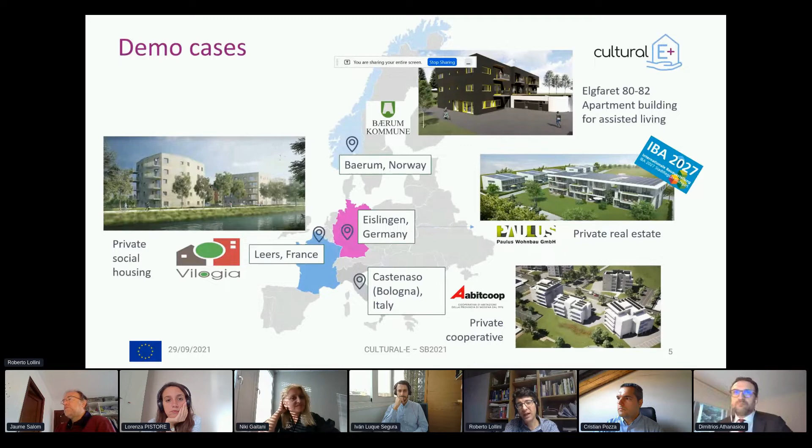So multifamily buildings in France, Italy, Germany, and Norway — different climates and different contexts. There are both social housing and private housing. The partnership is quite heterogeneous, with research centers as well as industry partners providing technologies, the owners, and a technical advisor to support the development of the positive energy building concept in the 4 demo cases.

We are trying to answer the impact as requested by the call, and to define possible replication scenarios - not only working on our demo cases, but also having a larger view. These are our 9 specific results: a platform where it's possible to analyze and define the context for the development of the design.

And so 4 key technologies, as I call it: a house management system, a smart hybrid ventilation through an active window, the use of ceiling fans for air movement - this is quite important to reduce the cooling need - and a decentralized packaged heat pump system, integrating both ventilation and heating and cooling system.

This estimation of the co-benefits or co-impacts is a sort of approach in order to estimate this as a real estate value for the building.

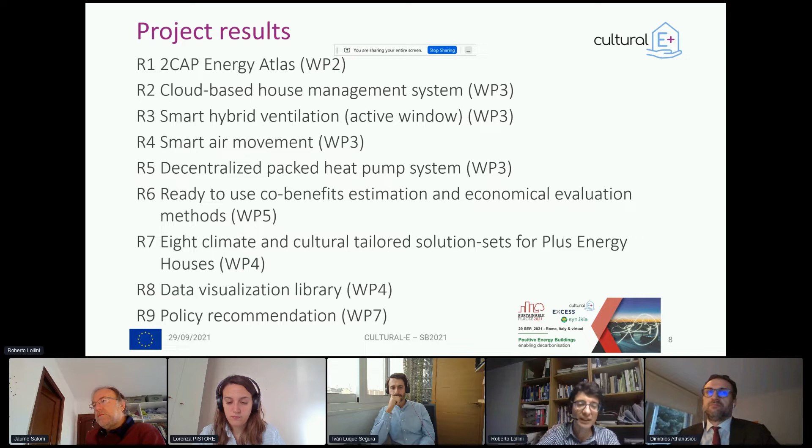The solution sets, as I mentioned, are an inspirational set of solutions to start a design process that has to be tailored to the specific context. Then there's a way to visualize the result of simulation, a tentative standardization to present the simulation results in a standard way, and then the policy recommendation.

Here it's the first step of this policy recommendation related to the positive energy building definition. It's a quite complex interaction among modeling, technology development, and implementation - practical implementation of the demo, design, construction, and maintenance of the demos.

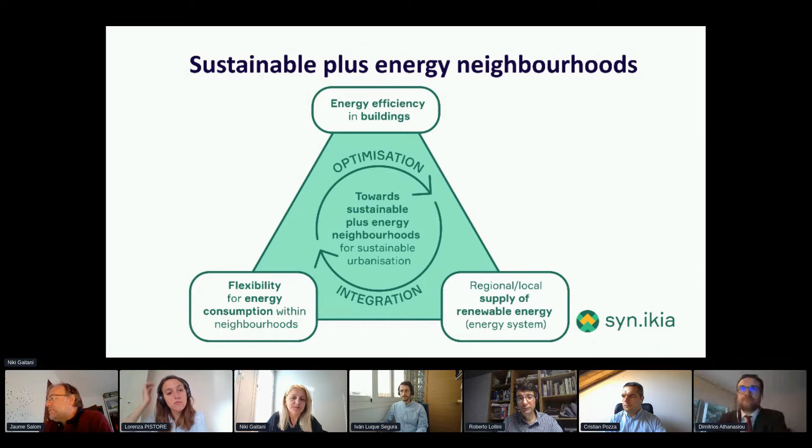A key challenge is to significantly increase the overall energy efficiency, energy flexibility, and climate resilience of neighborhoods. Our implementation plan is actually aligned to the set plan - it's about optimization of these 3 functions. The Synikia definition of sustainable plus energy neighborhood follows a similar procedure as described for buildings, but the geographical boundary is expanded to the entire site of the neighborhood.

The balance is calculated taking into account all building operational energies: space and domestic hot water heating, space cooling, ventilation, and fixed lighting, but excluding household appliances, the plug loads.

The Synikia concept relies on the premise that cost reduction can only be achieved by an integrated approach, taking into account the building and neighborhood level, energy efficiency, flexibility, good architectural and spatial quality, as well as user behavior and well-being. To demonstrate the functionality of the Plus Energy neighborhood concept, we are currently developing 4 real-life sustainable Plus Energy neighborhoods.

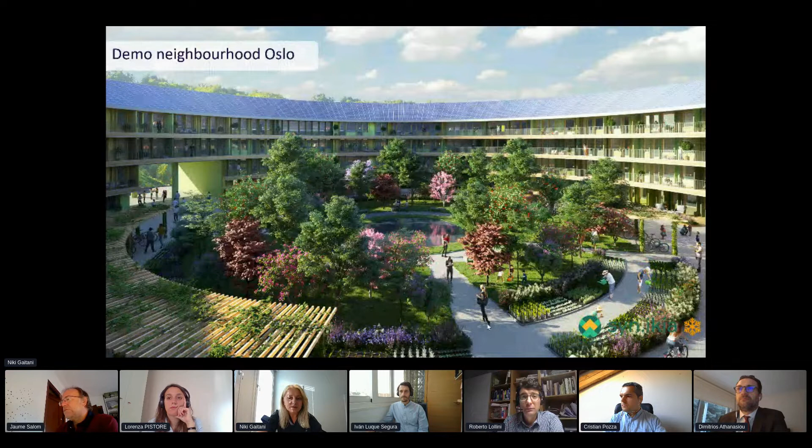In Norway, the demo project is a new development in Oslo, and in the Netherlands, the demo case is located in Uden, a typical mid-sized town in the Netherlands representing a marine climate.

The Spanish demo case is a new development in the suburbs of Barcelona, representing a typical Mediterranean climate. And finally, the 4th case, the Austrian demo, is a new build and renovation project located in Salzburg, representing a continental climate.

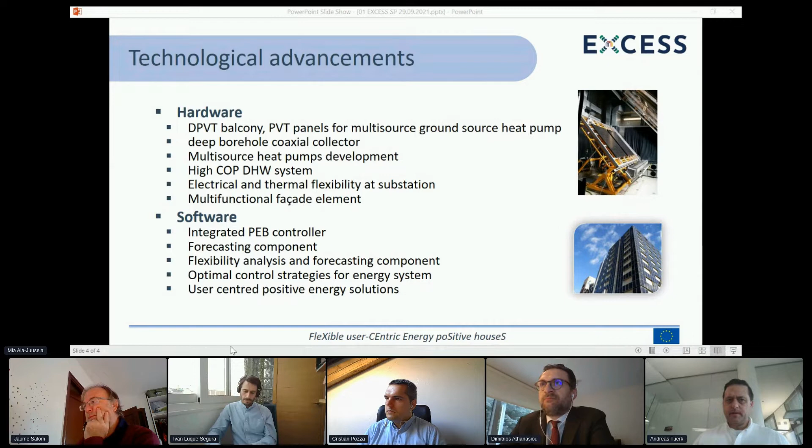I think this was already the short intro into the EXCESS project. I don't want to take too much time because we should move on discussing definitions. The discussion of PEB definition was a key element in the first work package of EXCESS that has been completed. It was led by Mia. I think we have very interesting findings of this first EXCESS work package that we would like to share today.

This next presentation is about the discussion that we have had among these three projects, and that's going to be presented by Cristian.

Cristian, do you want to share your own screen? Yes, let's try. Share the screen and put the slides on reading mode. That would seem to be the best option.

Can you see it? Yes, now. Okay, perfect. Okay, great. So...

This presentation is about, as mentioned, presenting our common work done in the last six months, and we will show you common points and discussion points, specifically around the PEB definition.

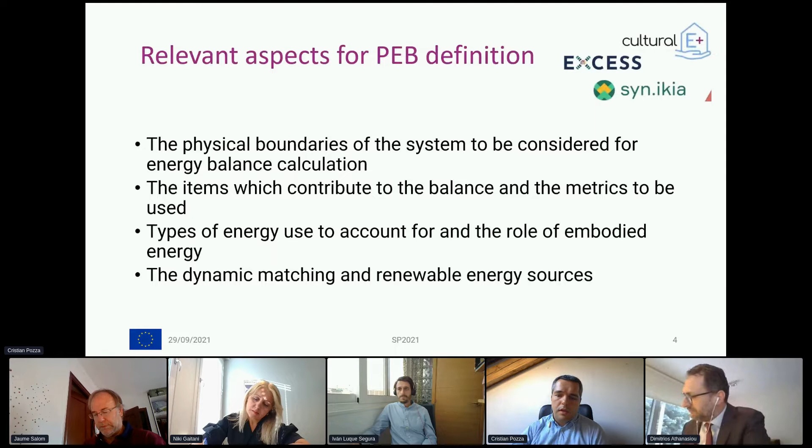Then, of course, we have different points of view, and the second part was aimed to define how these aspects are addressed, and in the discussion paper that we are producing, all these aspects are outlined shortly. So what we could get, for example, are some differences in the definition of the system boundaries, like what to consider as which energy uses fall inside the boundary, where the renewable energy is produced, where it is stored, and which energy efficiency measures are to be considered.

Also, the time dimension has a different point of view, and this different point of view is very important. It is the time over which the building and the systems are balanced, and this can lead to different considerations as well, and different conclusions.

Also, the energy use to be included into the balance is to make the total energy demand, as for example heating, cooling, domestic hot water, ventilation, lighting, and so on, has been discussed, and we have different points of view, but many things and aspects are in common again.

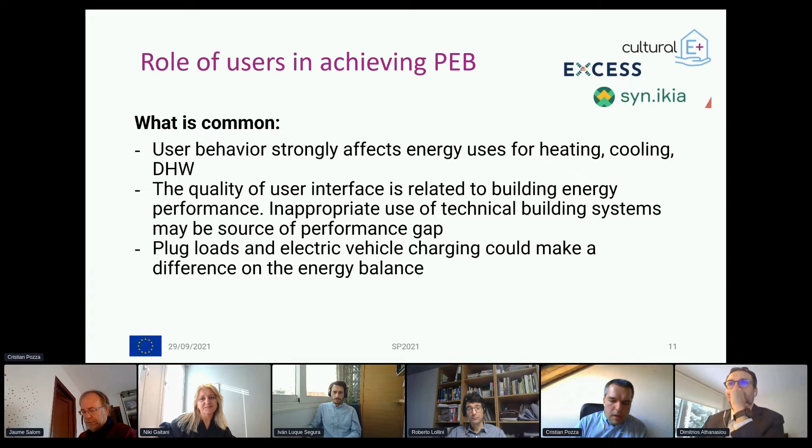identify correctly, or to quantify in some cases.

So the conclusions are the 3 projects produced this definition, which is only part of the 3 projects' specific definition, as: a positive energy building is an energy efficient building that produces more energy from renewable energy sources than it consumes over a time span of 1 year.

And the main difference that we found is whether we consider or not some facilities for renewable energy system, renewable energy source production to be within or outside the boundary.

Next steps will be to explore the role of users and to understand the trade-off between investment cost, operational costs, and benefits. I'll just take 2 minutes for the recommendation.

The first recommendation is residential buildings have great potential to reach positive energy building targets, while offices and educational buildings may achieve this target up to some extent. Then we must pay attention to affordability, cost optimality, and building value, and use that to motivate stakeholders.

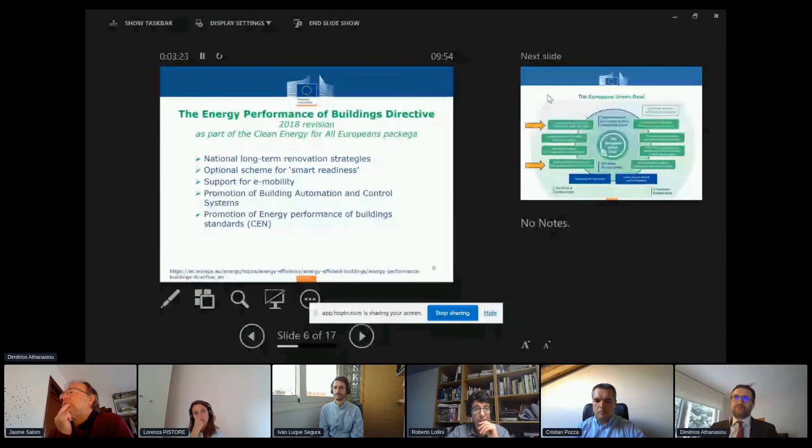We had an evaluation, and still there was room for improvement, and that's why we had the revision in 2018. But that was very targeted, building mostly on long-term renovation strategies, e-mobility, the smart readiness indicator, and the promotion of e-vehicle charging infrastructure. So it was very targeted.

Until the European Green Deal came, and it really recognized the importance of buildings, asking therefore for the renovation wave that we all know about, and also building on a new climate target plan for 2030, asking for more ambition and specific elements for buildings, for example that they have to reduce emissions by 60% and increase the renovation rate, start banning fossil fuels, increasing the renewable component, and so on.

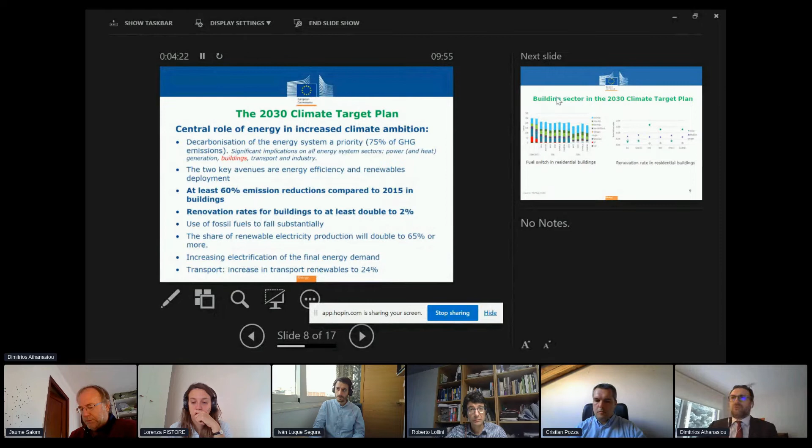So there is a whole new territory now, a whole new agenda, and buildings are very high on it. There was an impact assessment recognizing different scenarios explored, from fuel types to renovation rates. There are many, many results.

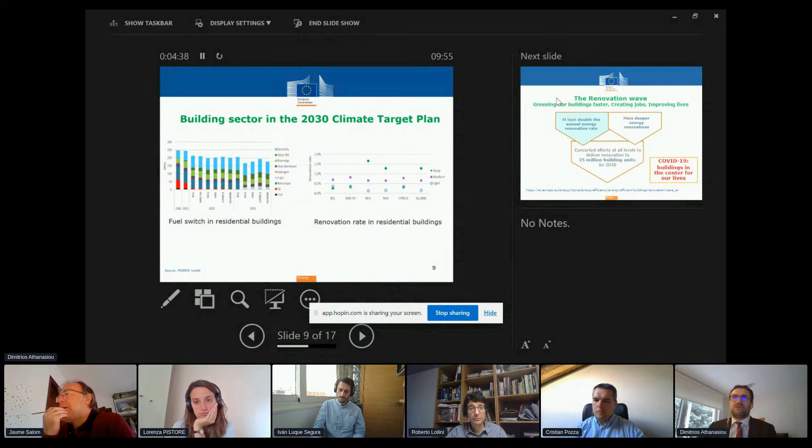Last year we published the renovation wave, asking to at least double the annual renovation rate and make deeper energy renovations and quality renovations, as we want to call them now, trying to renovate at least 35 million buildings in Europe by 2030. But also, as mentioned before by previous speakers, more elements have to be considered, like energy efficiency first, affordability, energy poverty, decarbonization, life cycle thinking, indoor environmental quality, and also health and other standards, so aesthetics as well, of course, and always smart solutions.

All these came with specific actions that have to be implemented through a very comprehensive action plan that has also been published together with the communication. I don't want to stick on that, but focus areas were the worst performing buildings, public buildings, and decarbonization of heating and cooling.

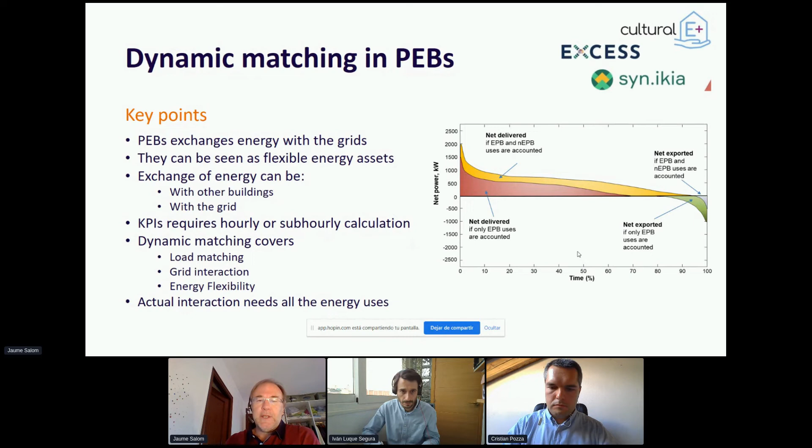Then, as Mia did also, I have a list of potential questions for you, in order to know your opinion and to give you the opportunity to make some observations. If you go to the poll section, I will ask three questions.

The first question I will make visible to you now is: how important is it to characterize dynamic matching? If you think that at the end the most important thing is the annual balance and the annual emissions balance, and dynamic matching is not so important because the energy grid will cope with that, or if it is as important as the annual balance.

Then maybe you can make your votes now, and we will see what people's opinion is. Yeah, I think we have some votes already now.

Okay, it seems that the majority of people think it is as important as the annual balance, but we also have some who think it's maybe not so important. Then maybe we can move to the other polls, but it would be good to know the opinion of that person who thinks it's not so important, afterwards in the discussion.

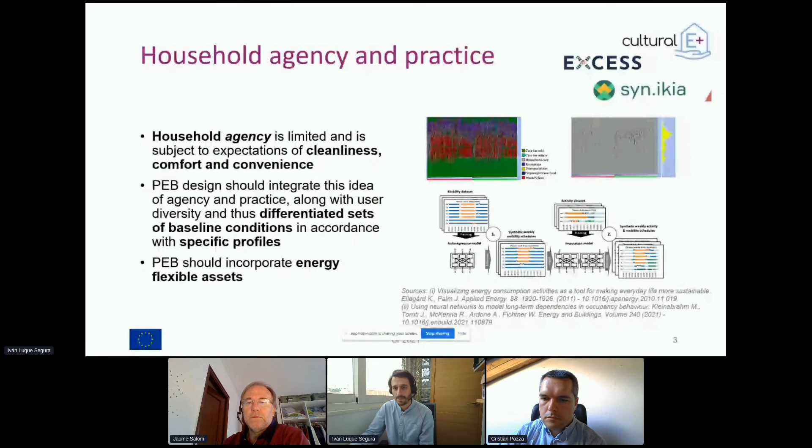Because individual households, however committed, cannot remain unaffected by wider societal trends, we need to analyze and study them and integrate them into the design. Plus energy buildings should also incorporate the energy flexible assets that this may bring into the performance, such as alteration of the standard context of the household or within a diverse building community with different behaviors and profiles.

Also, the indoor environmental quality is a key aspect related to users' behavior, and how to integrate a good definition may be a challenge. Indoor environmental requirements are currently strictly defined based on ideal conditions that generally match subjective sensation of neutrality, where user adaptation mechanisms are generally neglected, because building design usually privileges static environments over transient ones.

Very tight and static indoor environments do not allow us to integrate transition and stimuli as part of the building design, and we are losing potentialities and drivers that can help us meet the plus energy building targets. Then the design of buildings and systems often does not enhance occupant personal control over the environment, which is another key element that could make a difference regarding how to integrate users within the performance.

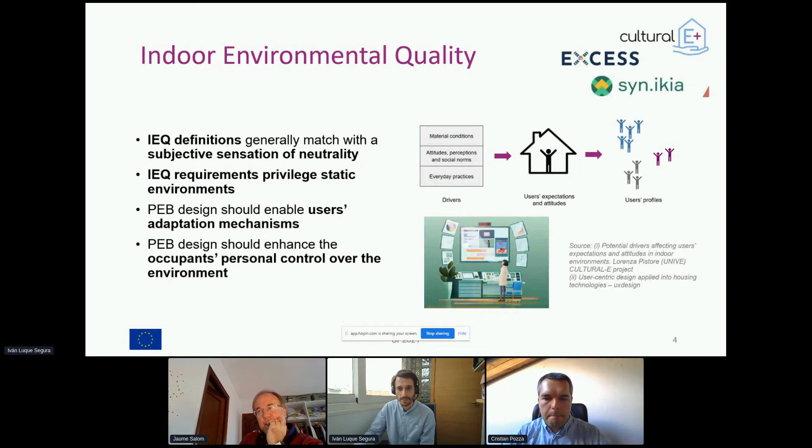As conclusions, we can say that integrating user diversity into plus energy building definition is key, because users do not set out to use energy. Rather, they seek access to energy services. Contrary to the conventional approach, accounting for user practices, attitudes, and expectations on energy demand and indoor environmental quality will allow that integration of a great range of cultural and social diversities into the plus energy building design, which is the scope of this at European level, to become a concept that is affordable and accessible to everyone.

So I've prepared a series of slides, and I'm going to activate a series of questions in the poll section, trying to discuss the framework of these two first questions, which I'm going to read now: what are the main challenges that building design will face toward building decarbonization, and what are the main dependencies and available options to incorporate new methodologies and criteria that may allow us to design successful positive energy buildings.